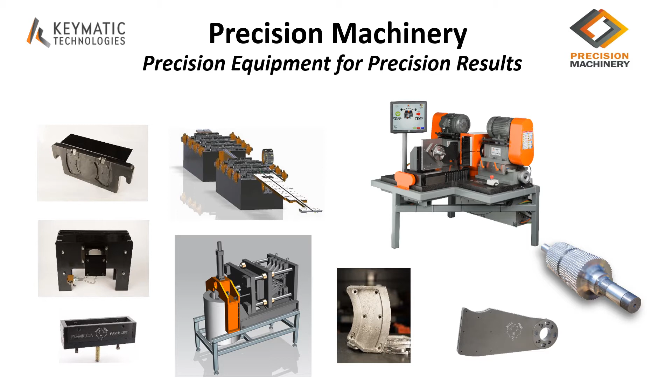My background includes high-tolerance mechanical applications. I founded Precision Machinery over 10 years ago, and one of the things I try to do is be personally involved in as many installations and projects as possible. That has allowed me to learn from men and women such as yourselves in over 200 mills across North America, Australia, and New Zealand. It has been a privilege.

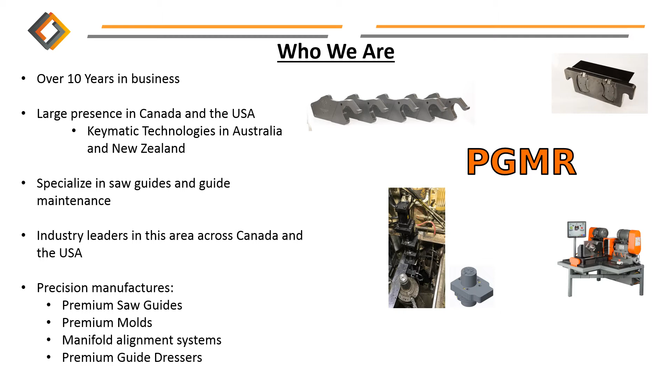Precision is located in Western Canada, and we have a large presence across North America. We work with Keymatic Technologies here in Australasia. While we provide other manufacturing services and equipment, saw guides and their maintenance has been a primary focus for us over the years. In addition to saw guides, Precision manufactures molds, manifold alignment systems, CNC guide dressers. Our popular semi-automated version is operating in over 115 mills now, and lubrication systems.

In the last 2 years, we released our new Kaiser equipment line, which includes a fully automated version of our popular CNC guide dresser, a fully automated disposable knife grinder, and a fully automated Babbitt molding machine.

As a company, we have always been focused on one of the most critical components to the manufacture of lumber, the saw guide. The time, cost, and careful work you put into your saws is devalued without properly manufactured and maintained guides to support them.

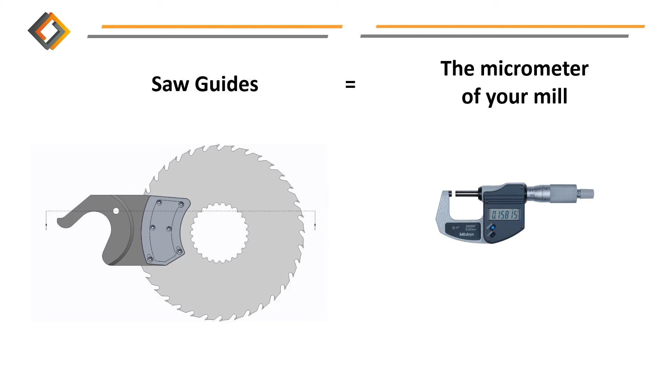As I once heard it put, a saw guide is the micrometer of your mill. I go into countless mills that are measuring lumber to thousandths of an inch, but then ignore the very component primarily responsible for sizing and deviation.

When I was here 2 years ago, I talked to you about guide maintenance and our new Teardrop pads. If you weren't here for that or don't remember, I'll give you a quick recap. This revolves around lubrication and support of the saw during operation. I will be talking about this more tomorrow in the afternoon workshop.

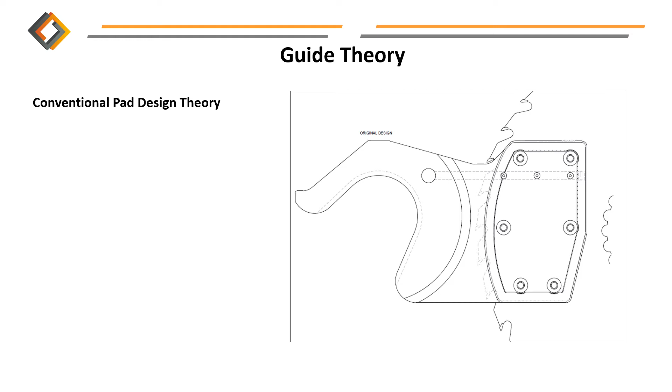The cooling and lubrication of a saw is commonly done with Babbitt pads mounted to a steel or aluminum saw guide. Historical conventional pad design theory involves a machined surface called a land around the pocket of a Babbitt pad. During operation, lubricant, usually a mixture of water, oil, and air, is pumped through internal galleries into the pocket. The pocket fills and lubricant is forced out onto the guide lands. The saw runs on a film of lubricant radiating outward from the filled pocket, essentially creating a flat bearing.

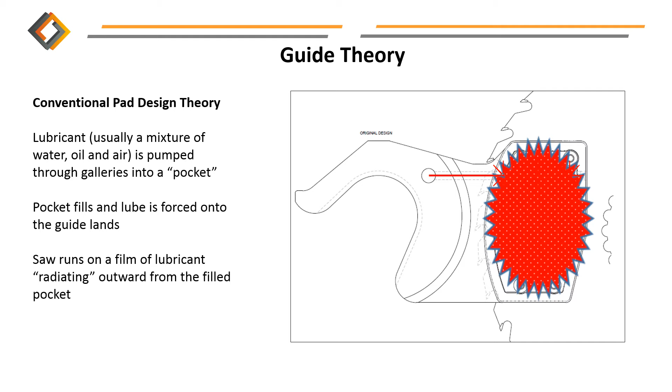That theory is out of date. In Western Canada, we have a scientific research organization called FP Innovations. They are not-for-profit, funded by industry, and their mandate is to further innovation and development in the forest sector. In 2016, we wanted to know if the industry's conventional lubricant supply theory was accurate. We found it was not.

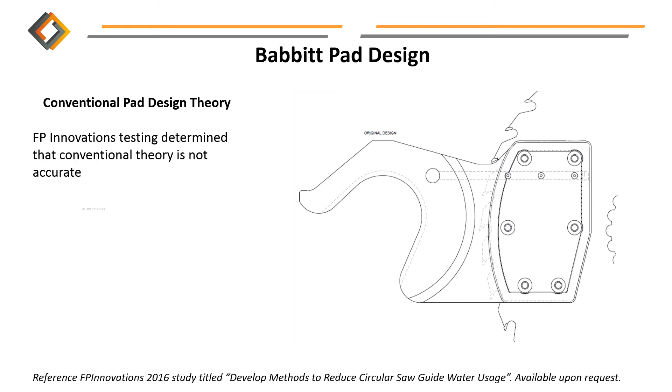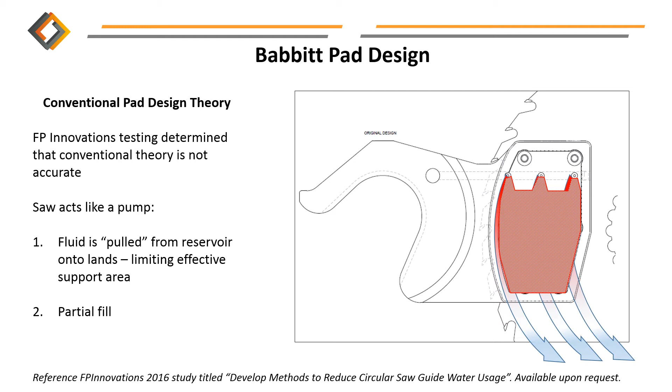For simplicity, think of the rotating saw acting like a pump. The movement of that saw, or pumping action, wants to draw fluid from the reservoir or pocket of the Babbitt pad. Depending on the direction of rotation and the shape of the pad, only certain areas of the support land receive proper lubrication, limiting the effective support and cooling area. In addition, the pocket experiences only a partial fill.

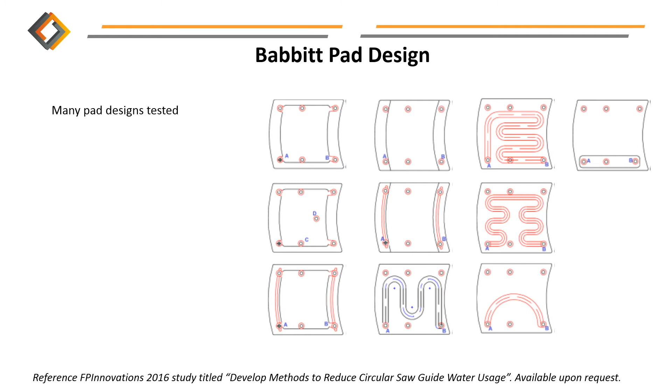The question then was, is there a better pocket or pad design? Several gallery and pocket designs were tested. The design that was eventually settled upon was what we refer to as a teardrop. You will hear me refer to the teardrop shape of the entry port. I am referring to these parts of the guide pad here and here.

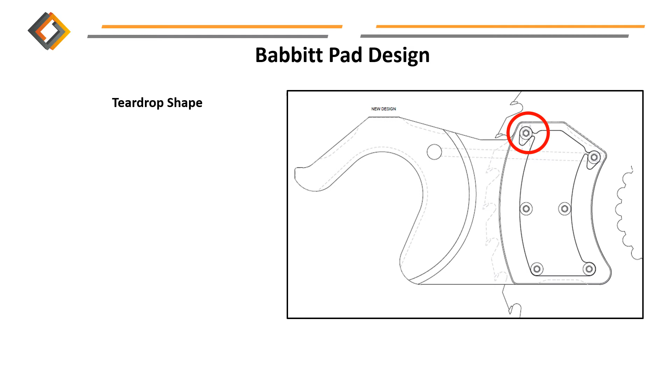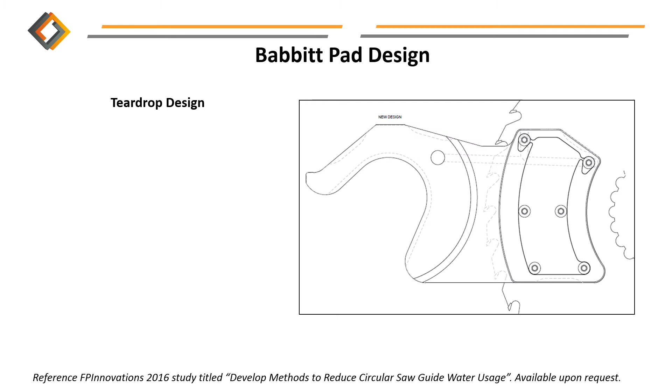Here's a close-up to give you a better visual. Rather than supplying lubricant to a pocket, we direct flow to the top of carefully designed guide lands, feeding them directly. In this drawing, you can see there is an entry land, but no exit land. We'll review that in a moment.

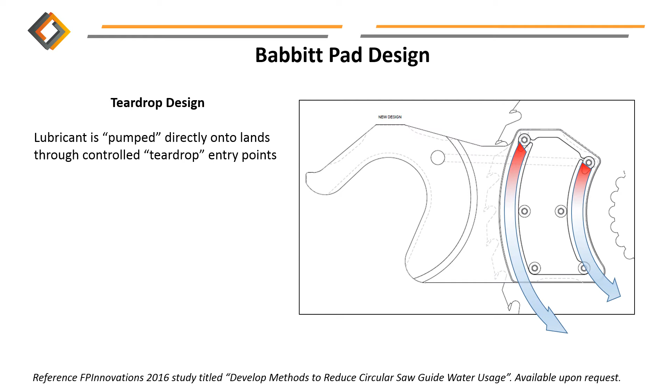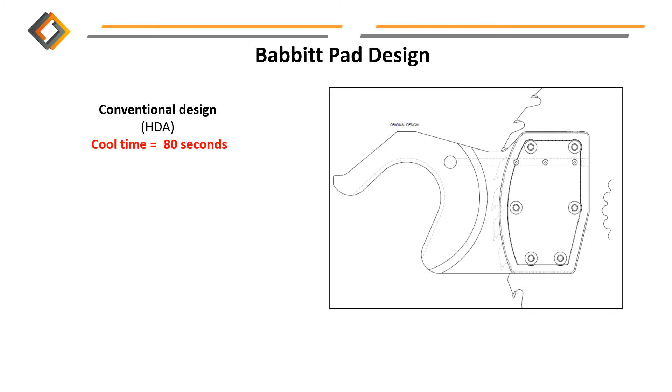Here's a recap of the test data from 2016. A set of saws was ganged up with conventionally designed guides and pads. Temperature sensors were put on the saws. The saws were started and several cants ran through. It took an average of 80 seconds for the saws to cool back to their pre-cut temperature after cutting. When the saws were run with the teardrop design, the cooling time dropped to 7.5 seconds.

It's fine if saw temperature increases uniformly during cutting, and we don't wait 80 seconds between cants. What the test showed was the extreme improvement in lubricant delivery to the saw. With tighter environmental regulations and increased cost of lubricants, being able to reduce usage and prevent saw damage is critical. Please contact us if you want to have a copy of the full report.

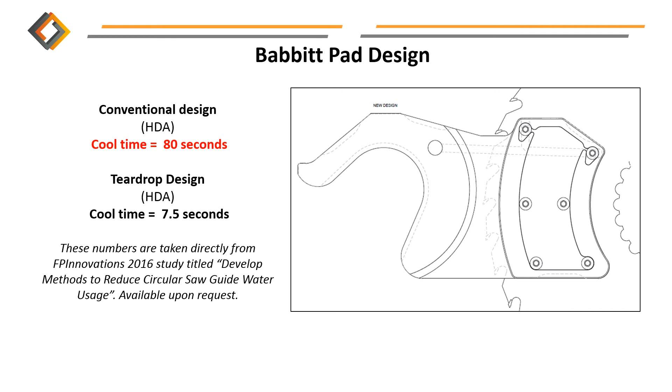I love new ideas and I love innovation, but I also believe in real-world proof. We performed the first teardrop conversion in North America, and we have permission to share this information.

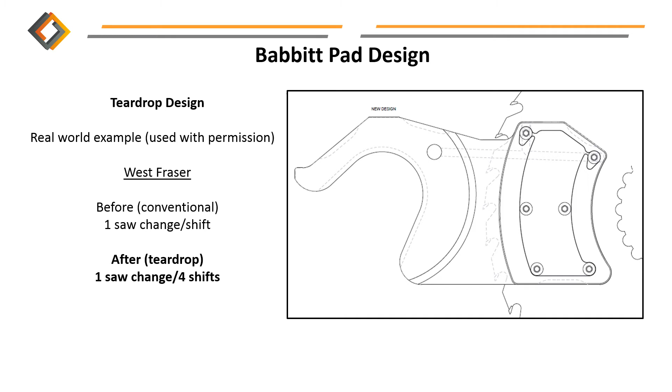There is a large West Fraser mill nearby our facility. The mill asked us to redesign and update their gang to the teardrop system. Before the conversion, the mill was changing saws once per shift. After conversion to the teardrop, the mill went to one saw change every 4 shifts. They were so happy with the results they converted the rest of their remaining machines.

The intent of the teardrop design was to achieve the same saw cooling with less oil and water into the saw box. What we have seen in a majority of our conversions is a substantial reduction in guide wear and saw damage. That translates to reduced deviation, longer run times, and less work to the saws after a run.

While a handful have not experienced those gains, they have been able to reduce oil and water. So the teardrop design has not only proven out scientifically in a test environment, but it has proven out in real-world application with resounding success.

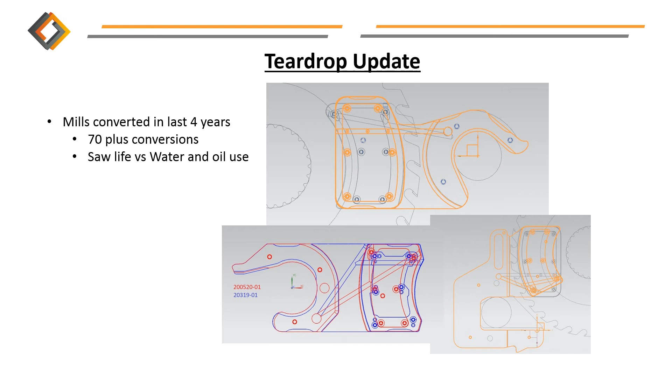I want to briefly mention the entry and exit lands I noted earlier. Initially, the scientists at FP Innovations felt the top and bottom lands may not be required. That was because the testing showed the lands added friction, as lubricant and support was happening on the curved guide lands. We have always maintained that the entry land must stay in place.

We don't want to leave a larger opening than necessary for small debris such as slivers or sawdust to get caught. The small 1.5 thou gap for standard saw clearance is preferable to prevent this.

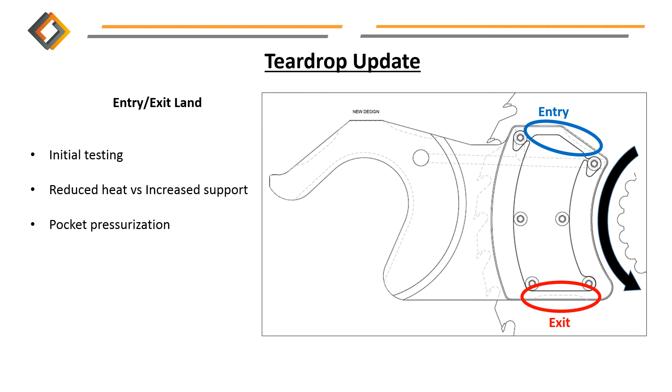Further testing showed a trade-off between heat and support. While the exit land is another friction point, it performs a couple other important tasks. The first is support. While it may add some heat back into the saw, it slows pad wear in the area. The second, more important benefit is that it allows pressurization of the pocket.

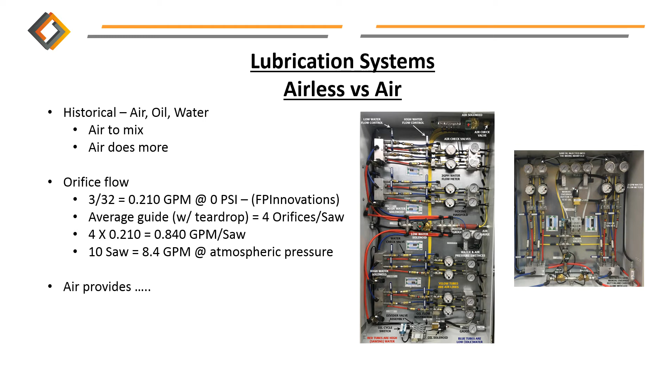Now introduce air. If you put oil through a clear line and then introduce air, an interesting thing happens. The oil flows around the outside of the pipe while the air passes through the center. Air becomes a carrier. Air provides volume and pressure and allows us to equalize flow through the guide system, especially in larger machines. Air also provides pressurization of the guide pocket, creating an air seal against foreign contaminants in the pad. Such air seals are common on bearings in many applications.

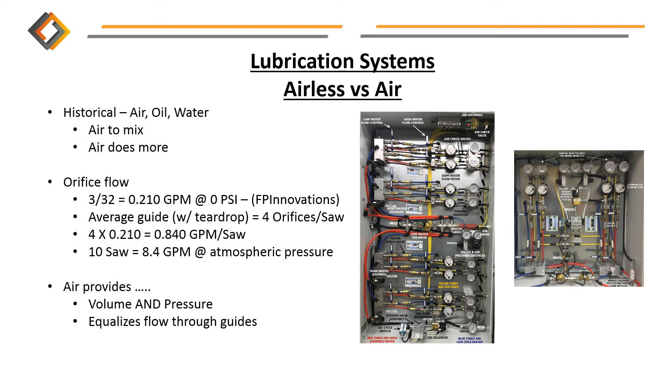That's why you will see these reliefs in our guide pad design. It allows air to positively pressurize the pocket area.

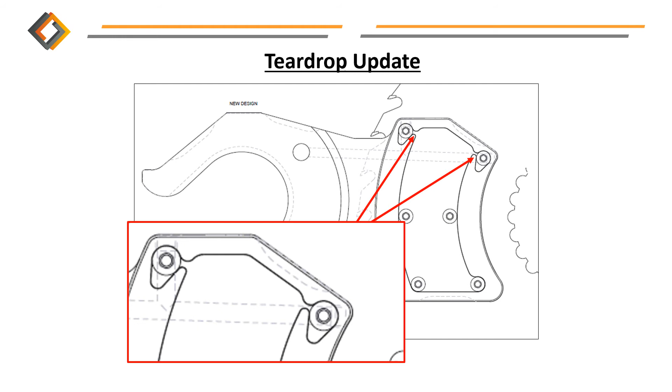When developing such things as new pad design, to be scientific we must gather data or measure something. For me to simply tell you a saw ran longer means very little. I'm sure we've all seen saws run from mere seconds to weeks. So much is dependent on other factors that we can't see in the saw box during operation.

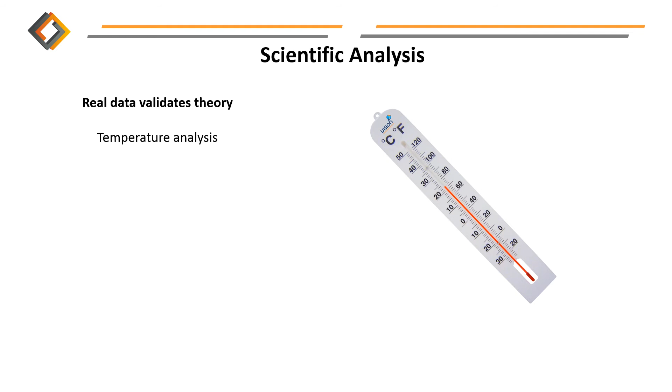In mechanical applications we often measure temperature. Vehicles have many rotating components that are monitored for heat, even in your mill, gearboxes, planers, etc. The list is extensive.

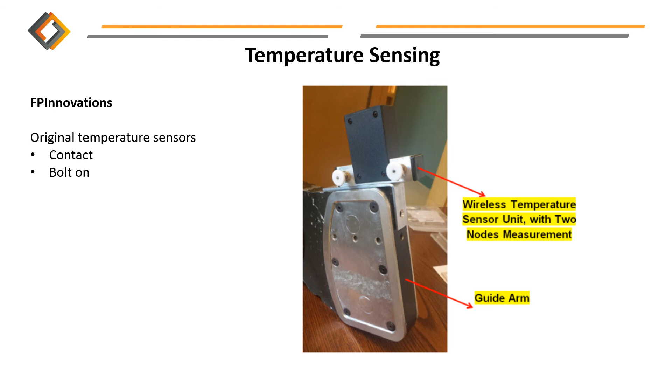FPInnovations realized this and came up with a rudimentary temperature sensing system they would use in the lab and field during testing. You can see a picture of that original system depicted here. This was a bolt-on box that had spring-loaded sensors contacting the saw. I have a couple of good friends that are saw filers.

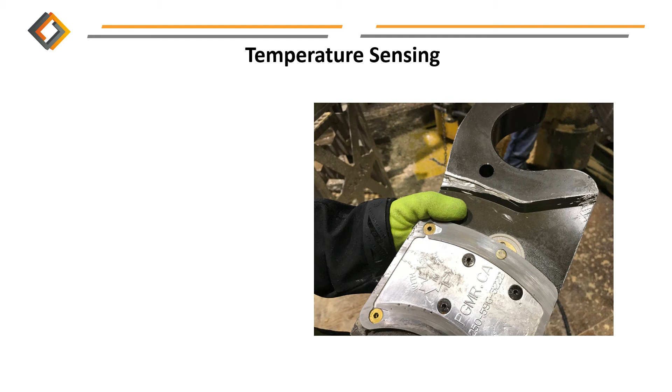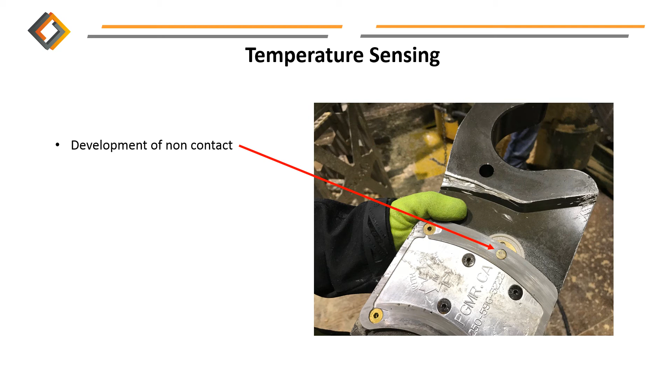One thing they do not like is anything touching their saws, including people. Springboarding off of FP Innovation's initial contact temperature sensors, we started development of a non-contact version of a sensor. What you see here in the picture is that non-contact sensor. This was one of our initial test mills. We elected to go with a single sensor near the rim of the saw where we were most likely to see increases in heat.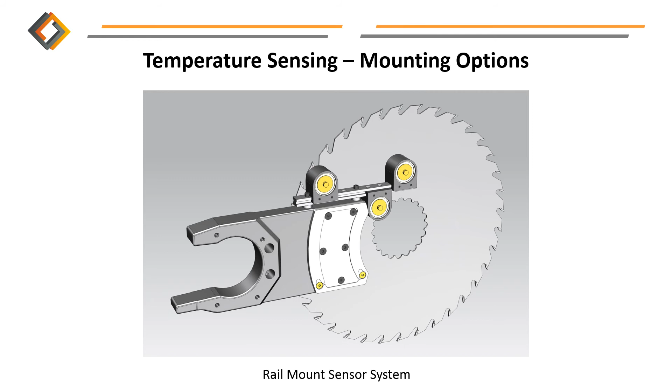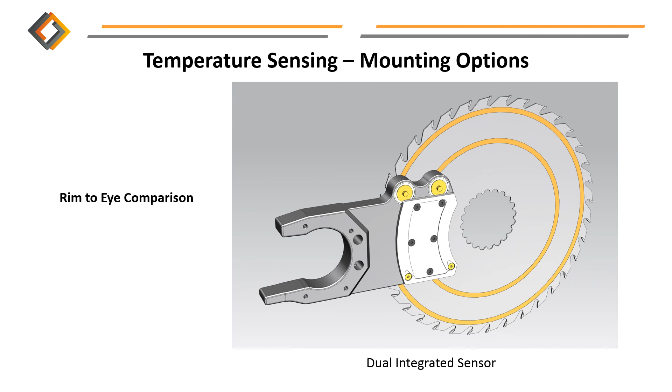Some mills want to be able to see the difference in temperature between the rim and eye, so they can analyze if there's an inconsistent heat change across the saw. While that data is interesting, I feel it hasn't led to greater gains in predictive analysis.

We have found the single integrated sensor to be the most effective version to date, as it gives us solid information on saw performance. Oftentimes, we have to determine what data is important. When there is an increase in the differential between eye and rim, it always happens during an incident that raises saw temperature. I like to look for changes from normal.

A good operator knows how his machine should run during normal operation. Often he even knows if it sounds wrong. We watch for those spikes in temperature that indicate an issue.

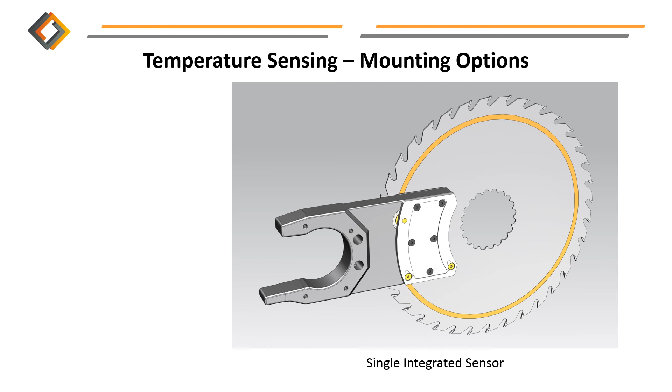The software allows you to set alarms for yellow warn and red alert. Once these settings are established, your staff can start to predict potential problems and failure. Rather than reacting to a problem, such as off-size lumber, we can see when a failure may occur.

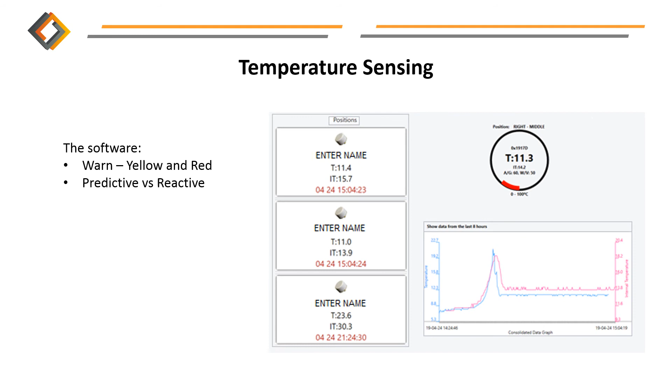As familiarity with your particular machine develops, you have options to tie temperature warnings into your control system. For example, if a zone starts to heat up, you may choose to raise water to that area in order to run to a more appropriate time to shut down and change saws. You may also elect to reduce feed speeds or gap for a brief time in order to keep the saws cooler. You may even choose to perform a saw change rather than experience a failure.

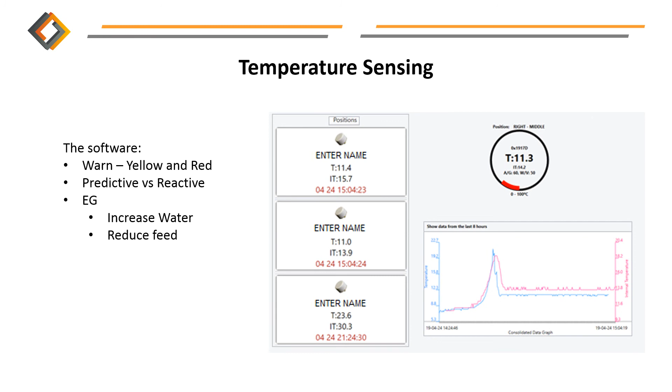Let's look at how we get the sensors into the guide stack. Rather than mounting sensors in every individual guide, we monitor the saw in zones. We can mount the sensors in every guide, but again, I come back to what data is necessary.

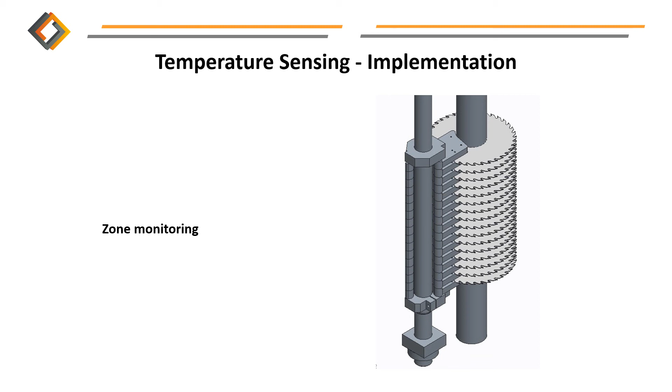As an example, take this vertical single arbor machine with 14 saws on the arbor. We mount 3 sensors in the stack, one in the primary cut zone at the base of the stack, one near the top end of the stack, and one in the middle. That's 3 sensors across the saw set. We can change this to any configuration and increase or decrease sensors, but this gives us an excellent idea of how the stack is performing.

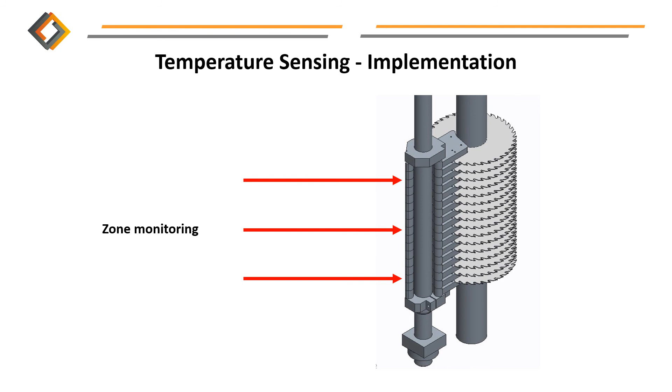The sensor itself is small. It transmits data wirelessly, so there are no wires to connect to the guide. The batteries in the sensor are guaranteed to last 1 year. You can enable or disable a sensor and see its data using an app on your Android phone. We have options for cloud-based or local monitoring.

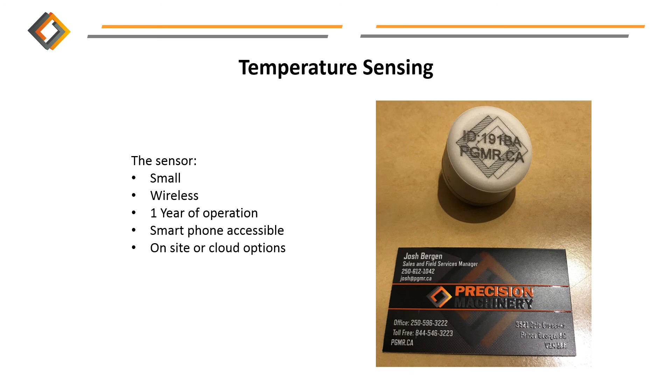It's important your maintenance staff can see what's happening with temperature in real time. We like to set up monitors in the operator's booth and saw shop. This allows staff to build familiarity with normal and abnormal temperatures.

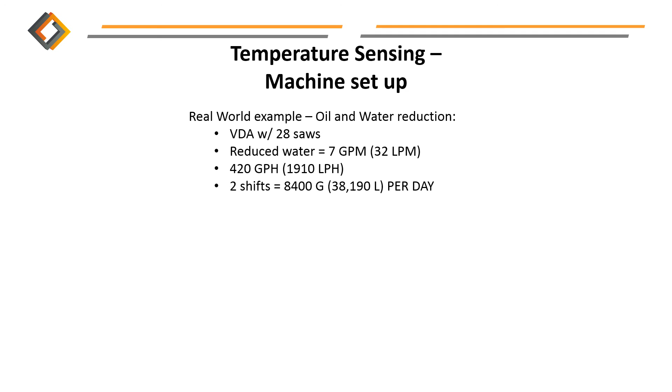One final real-world example, because they appeal to my practical brain. We had a vertical double arbor running 14 saws per arbor. We were able to reduce water by 7 gallons per minute across 4 zones without increasing saw temperature. That's 420 gallons per hour and 4,200 gallons in a 10-hour shift. This particular mill ran 2 shifts, so that was a total reduction of over 8,000 gallons of contaminated water per day that is no longer being run through that one machine.

Environmental gains are not our only benefits. We have to deal with sub-zero temperature in our area, and for that reason alone, the mill was very pleased. Additional benefits were for secondary uses for the byproducts of lumber production. For example, the sawdust was drier.

Another of our mills used the temperature feedback to optimize feed rates on larger diameter wood. They found that when they ran too many large cants in a row, temperatures would spike and cause damage to the saws. By increasing gap slightly, the mill was able to run longer between changes and increase production.

One mill, running multiple arbors, found one of their zones was 12 to 15 degrees hotter than the others. When they investigated, they found a cracked supply line.